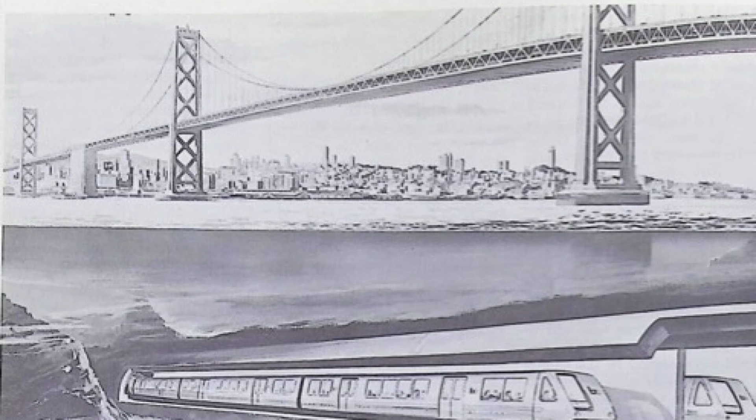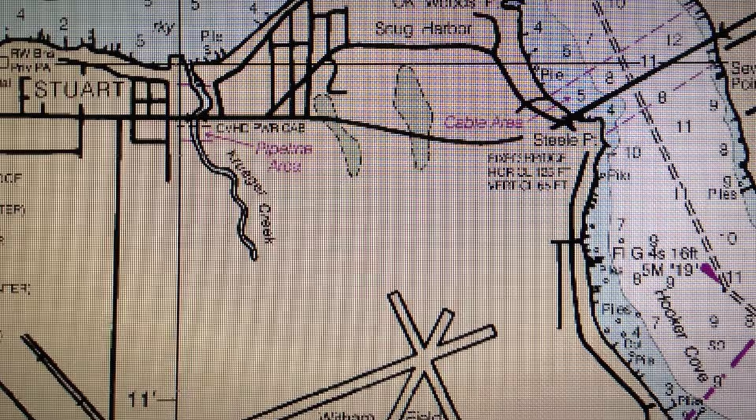Building a bridge seemed obvious at first. By the 1950s, suspension bridges were getting longer, reaching farther, conquering rivers and bays across the country. On paper, a bridge across the Chesapeake looked straightforward, except one detail changed everything.

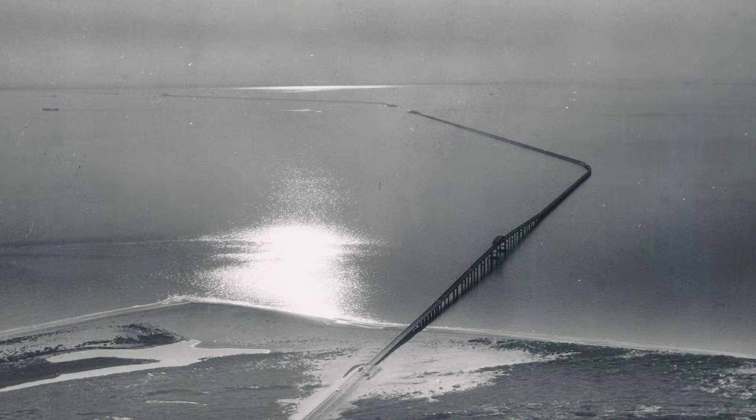The mouth of the Chesapeake Bay serves as the front entrance to Naval Station Norfolk, the largest naval base on the planet. Every aircraft carrier, every destroyer, every supply vessel assigned to the Atlantic Fleet must pass through a narrow corridor called Thimble Shoal Channel to reach open ocean. During the Cold War, that passage carried strategic weight. Navy planners raised a scenario engineers could not dismiss.

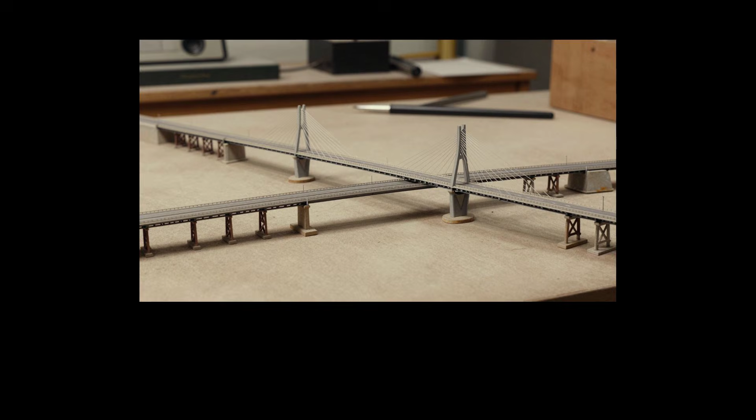What happens if a bridge collapses into the channel? It did not matter whether it was an accident, a storm, or an attack. The wreckage blocks the passage. The fleet gets trapped inside or locked out when it needs to return. They called it the cork in the bottle problem, and the Navy made their position unmistakable.

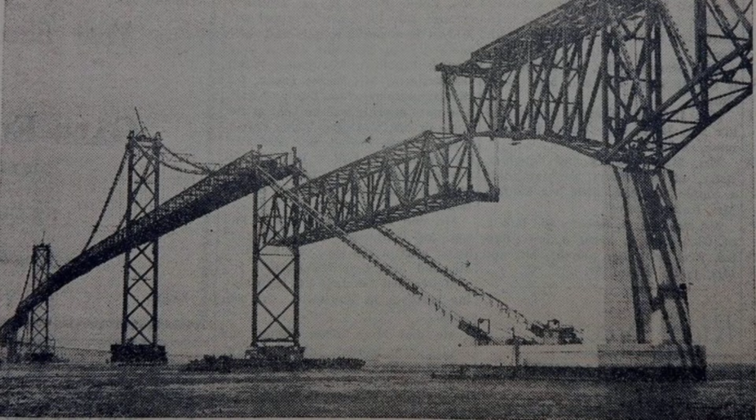Nothing could stand above those shipping lanes. Nothing. That single requirement eliminated the simplest solution and forced engineers to rethink the entire approach. They could not cross over the critical channels. They had to disappear beneath them.

The solution became a hybrid system. Instead of one continuous structure, they proposed a chain of different components, each solving a specific challenge. Low trestles would span shallow sections where ship traffic was minimal. High bridges would arch over secondary channels where collapse would not trap the fleet. But under Thimble Shoal Channel and Chesapeake Channel, the roadway would sink completely out of sight. Elegant on paper, nightmarish in practice.

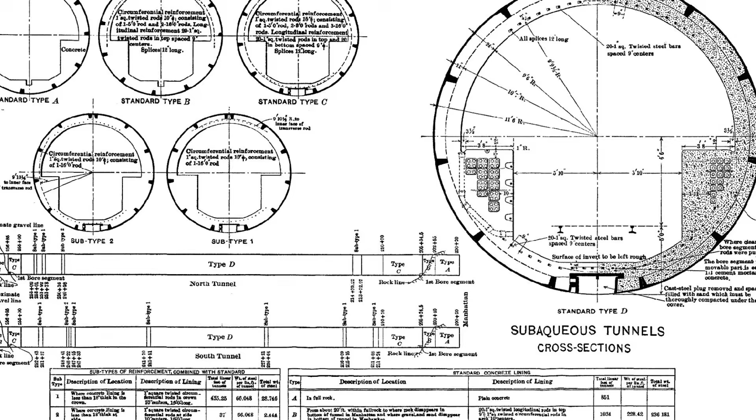Making those tunnels work required solving an impossible problem first. Where do you put the tunnel entrance when there is no land? Just open water, soft seabed, and currents that never stop moving. If the road needed to dive underground, it required solid ground to do it from. That meant creating land where none existed.

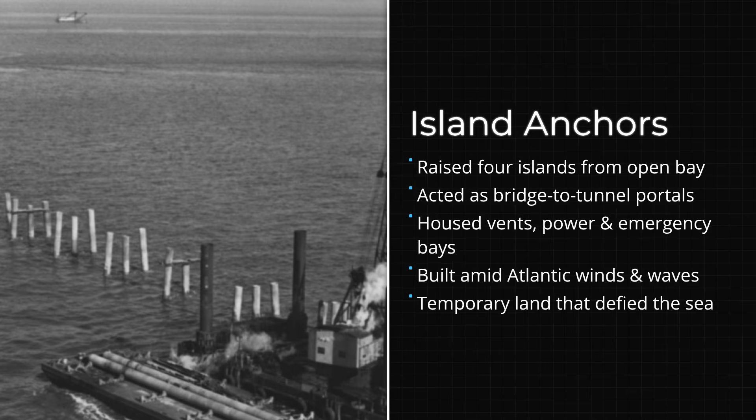The answer was 4 artificial islands positioned precisely at each tunnel entrance. These islands would anchor everything, housing ventilation systems, emergency access, and the transition points where bridge became tunnel. But building islands in 30 feet of water exposed to Atlantic weather, that is where things got interesting.

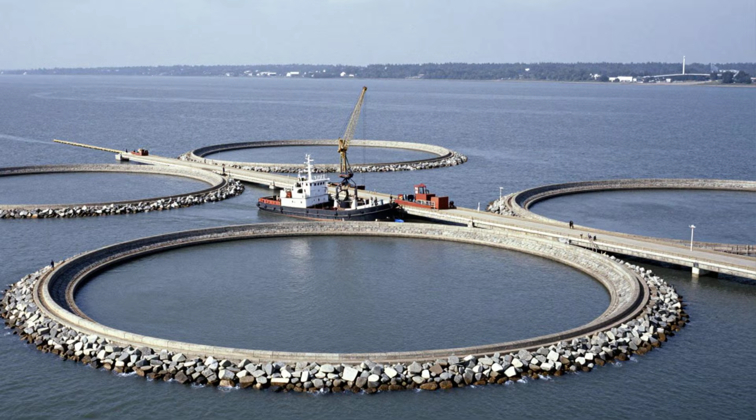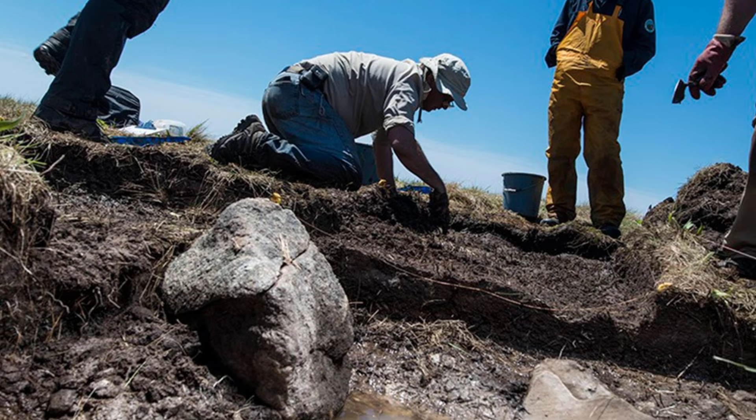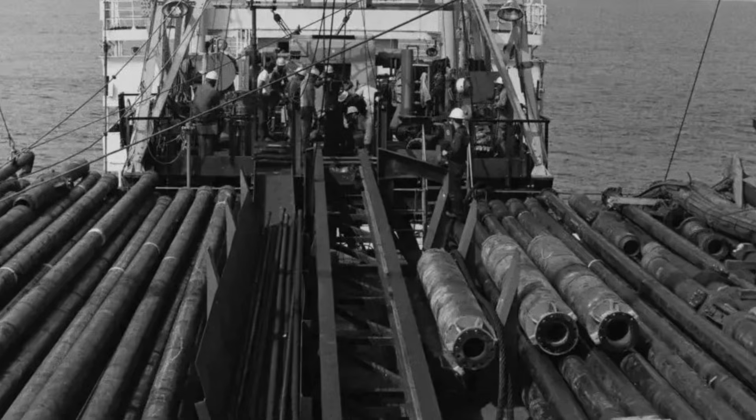Construction started by placing rock dikes on the seafloor to outline each island's shape. Inside those boundaries, hydraulic dredges pumped millions of cubic yards of sand into position. What rose from the water was not solid ground initially. It was a temporary landscape that needed to settle and compress under its own weight before anything permanent could be added. The islands were intentionally built taller than their final height, allowing soft sediments below to squeeze down before real construction began. Only after that settling slowed could work continue.

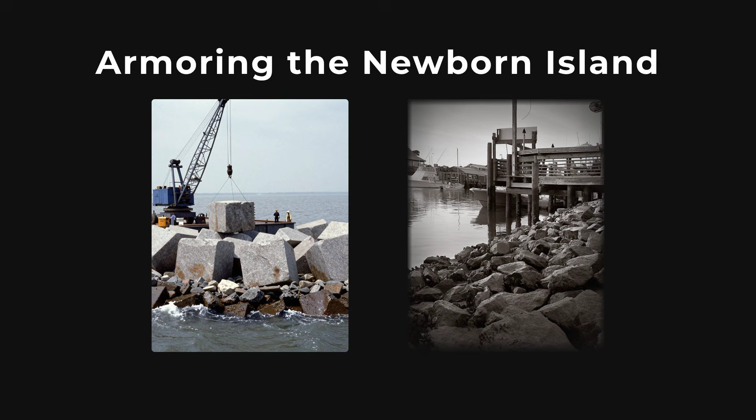To keep waves from washing the sand cores away, crews armored each island with massive stone layers. Small filter rocks came first, then granite blocks weighing several tons each. This armor reached above and below the waterline, protecting against wave action, tides, and storm surge.

For a period, it must have looked surreal. Land appearing in open ocean where only water had existed before.

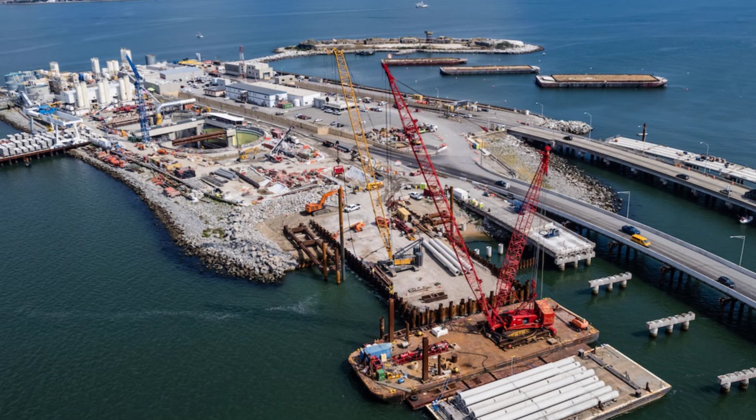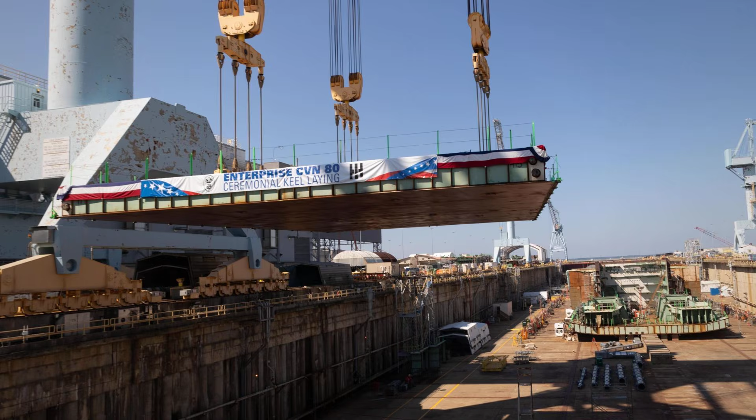The tunnels themselves were not carved through bedrock. They were built hundreds of miles away. Engineers chose a prefabrication approach, treating each tunnel section like a massive floating vessel. The sections were constructed at shipyards in Texas as sealed steel shells designed to float. Each completed section was launched into the water and towed 2,000 miles up the Gulf Coast and along the Atlantic to Virginia. Losing one at sea would have delayed everything by months.

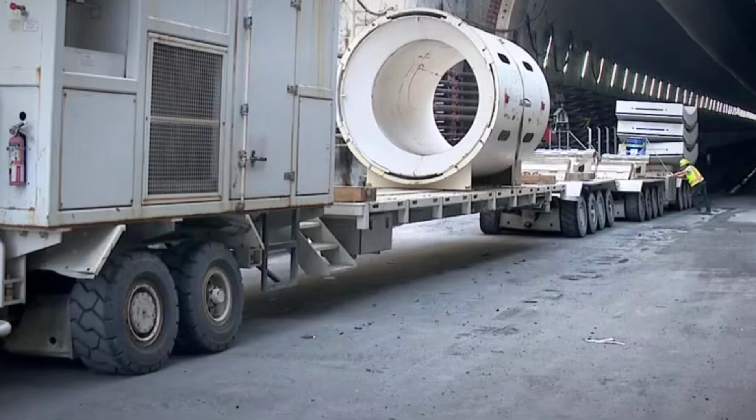While those tubes traveled, another operation was happening underwater. Crews dredged trenches across the bottom of each shipping channel, preparing foundations with extreme precision. A layer of pea gravel was placed and leveled to within inches using specialized equipment dragged along the seabed. If that foundation sat uneven, the rigid tunnel sections could crack or fail once buried under sand and pressure.

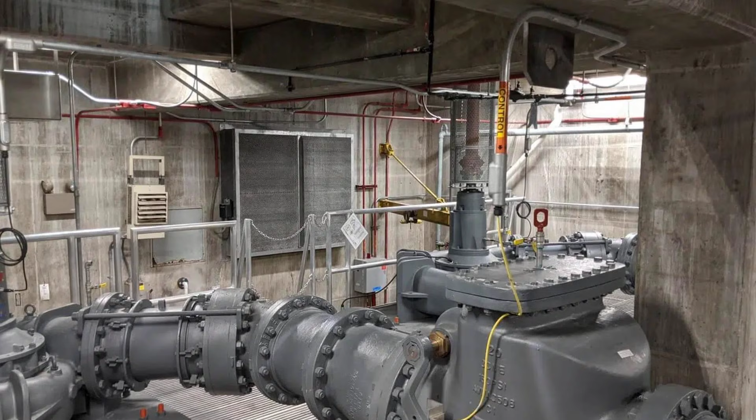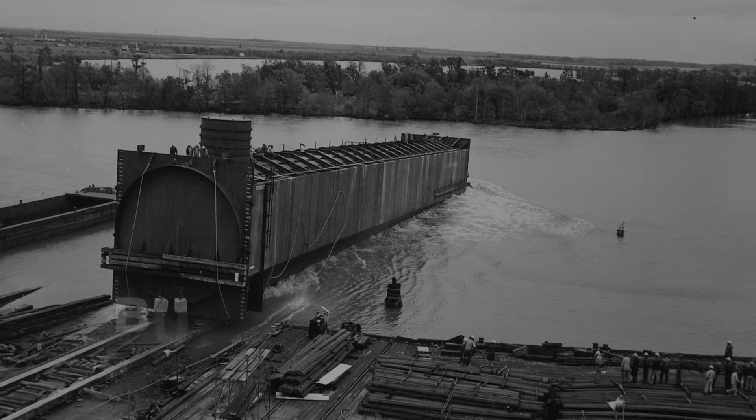When the time came, each floating tube was positioned over its trench and slowly lowered into place. Divers worked underwater, while support crews coordinated from above. Once two sections met, they were sealed from outside using concrete poured through tremie pipes. After curing, the water trapped between sections was pumped out, and workers entered to weld the steel shells together from inside. What happened next determined whether this entire approach would work. Concrete lining followed, transforming those floating steel shells into permanent roadways beneath the bay.

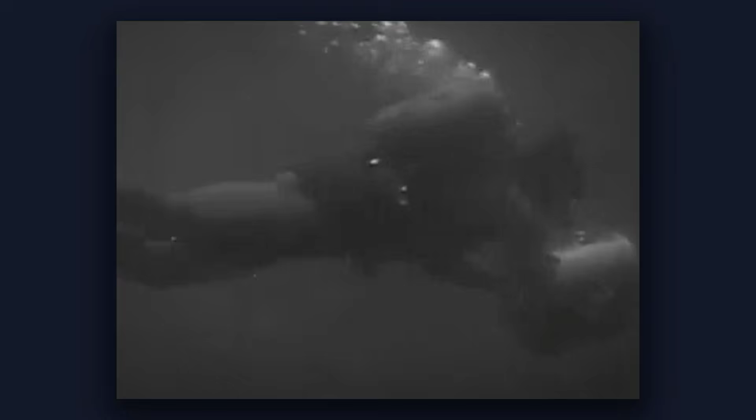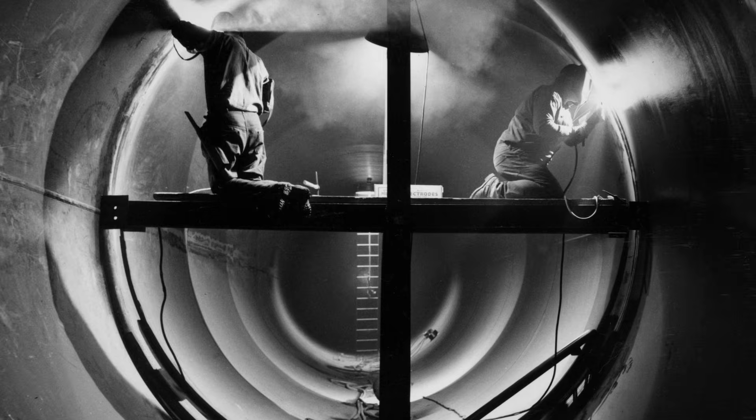Section by section, the tunnels took shape. Each connection required absolute precision underwater. Divers sealed joints with concrete poured through tremie pipes, while support teams coordinated from the surface. After each seal cured, water trapped between bulkheads was pumped out, and workers entered to weld steel shells together from inside. It was a process that demanded unwavering focus. One mistake could compromise an entire section.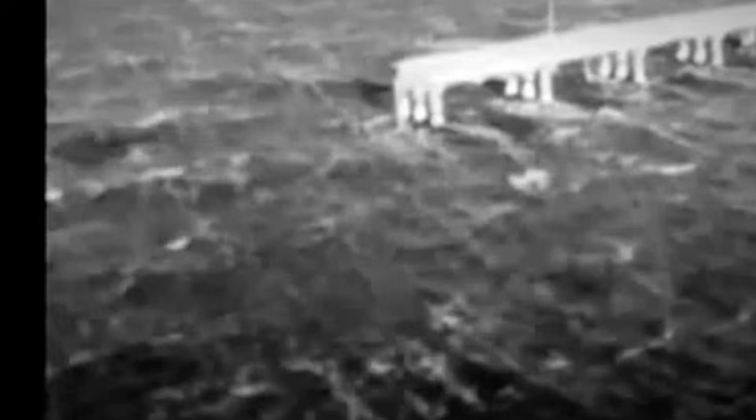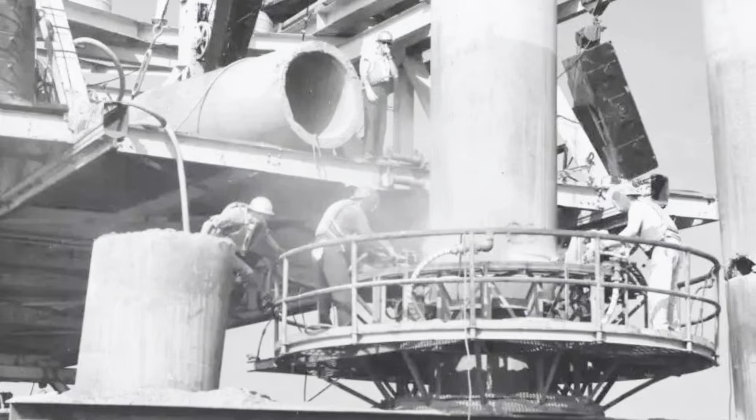Meanwhile, above water, the bulk of the crossing was advancing at remarkable speed. Most of the Chesapeake Bay Bridge-Tunnel consists of low-level trestles stretching across shallow sections. These spans needed to be built quickly and consistently. The seabed offered no bedrock for anchoring, just sand, silt, and clay, layered thousands of feet deep. Every support pile depended entirely on friction. Massive pre-stressed concrete cylinders were driven deep into sediment, some reaching over 170 feet below the waterline. Once positioned, those piles gripped surrounding soil tightly enough to support roadway weight, traffic loads, and storm forces for generations.

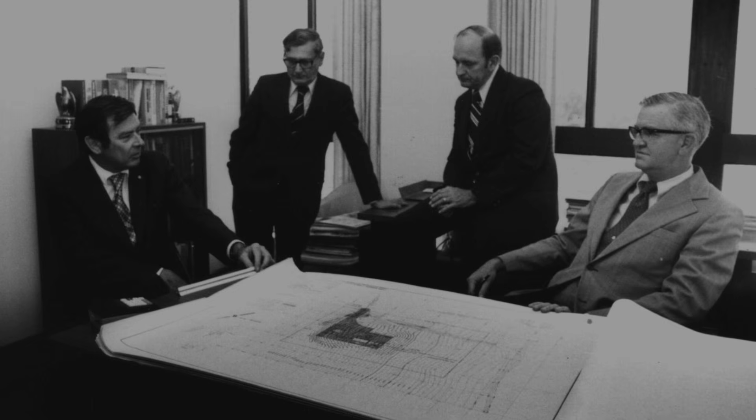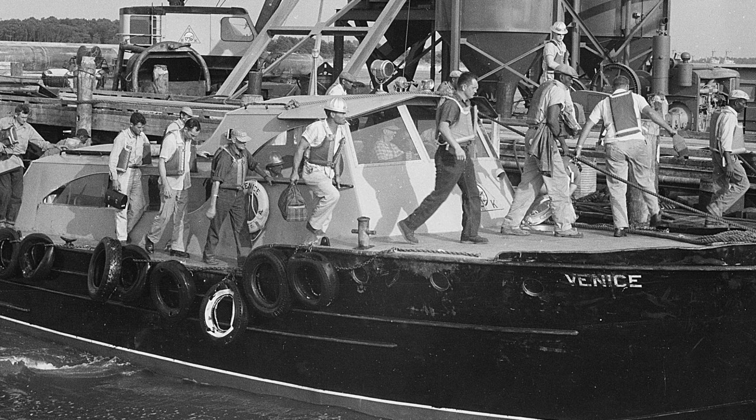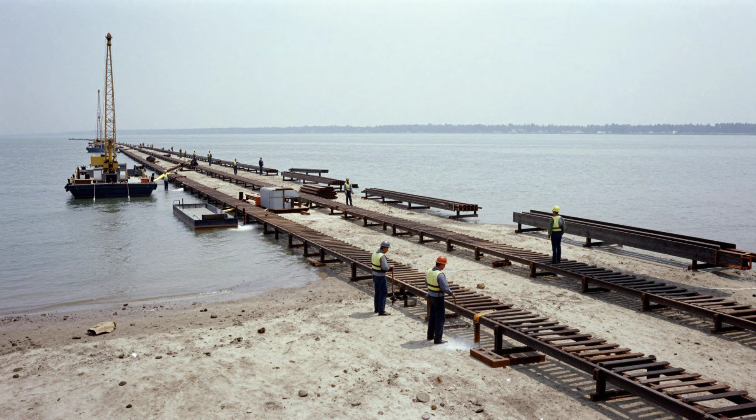Efficiency demanded specialized equipment. The construction crews relied on a jack-up pile-driving platform known as Big D. This machine transformed open ocean into a stable worksite. Steel legs descended into the seabed, then the platform jacked itself above the waves. Elevated and steady, cranes and hammers operated with precision no floating barge could match. Construction progressed like clockwork. Piles positioned, jetted into sand, driven to depth. Trestles advanced steadily across the bay.

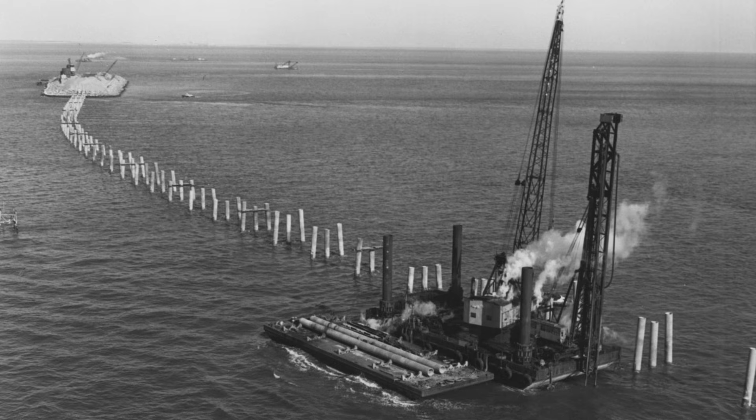But this efficiency created vulnerability. The entire operation depended on keeping Big D operational. There was no backup equipment of equal capability. By early 1962, the project was moving forward on an unforgiving timeline.

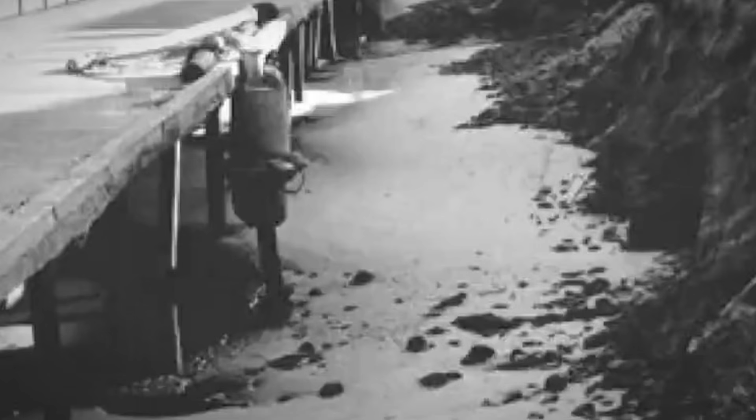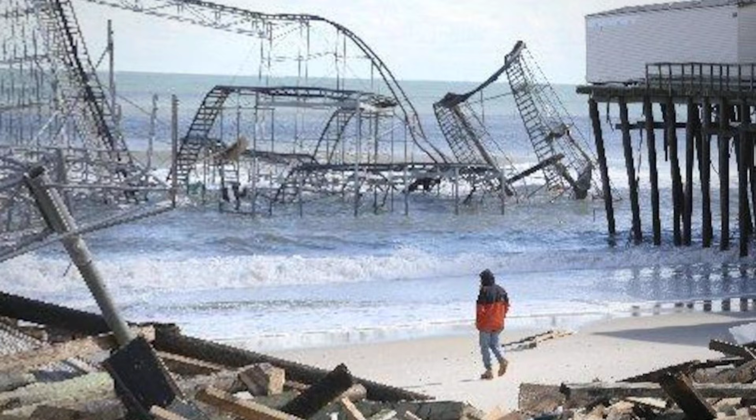Then the ocean intervened. A nor'easter stalled off the Atlantic coast. Instead of striking and moving on, it remained stationary. Wind and surge hammered the mouth of Chesapeake Bay relentlessly. Big D was jacked up to ride out the storm, but waves began pounding the underside of the elevated deck. Each impact transmitted force downward through the steel legs. The structure endured blow after blow until it could not anymore. The legs buckled and Big D collapsed into the sea.

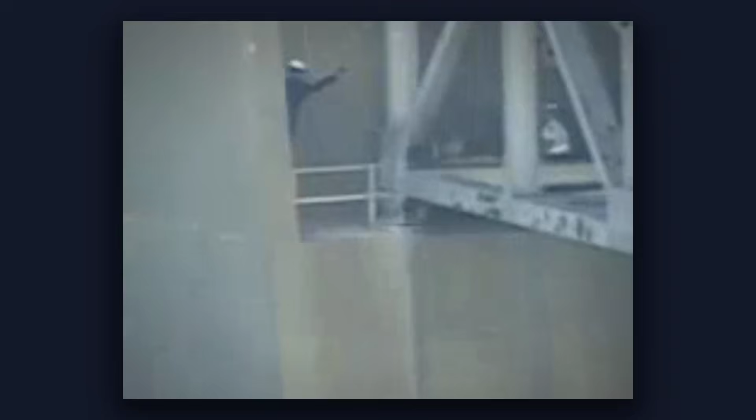As the storm continued battering the construction site, crews were evacuated by helicopter under dangerous conditions. No lives were lost in the collapse, but damage extended beyond the sunken platform. Across the project, partially armored island sections had eroded. Sand washed away where protective rock had not been placed yet. The storm exposed every weakness in incomplete defenses.

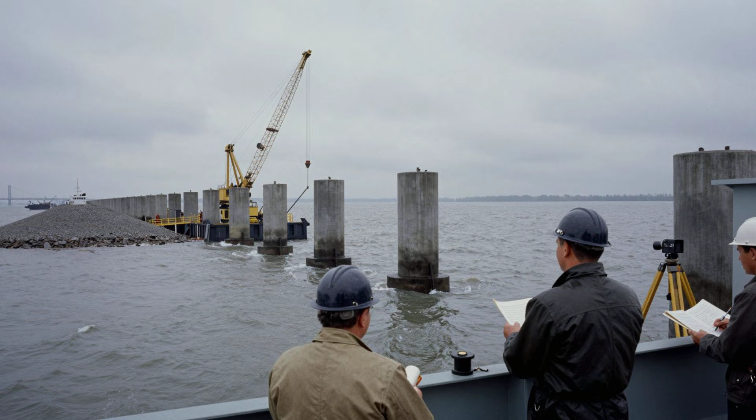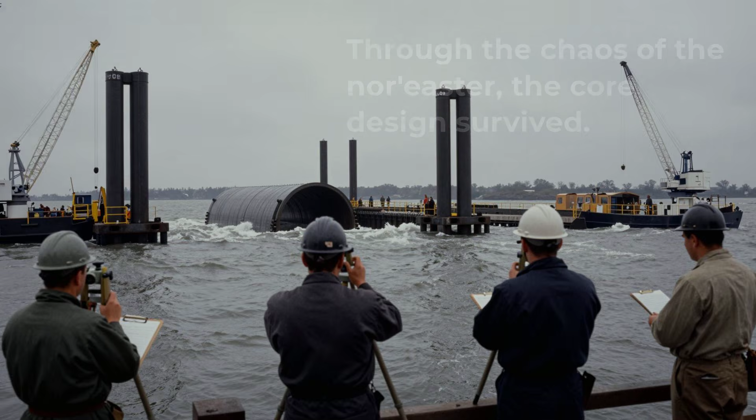Yet something crucial became clear in the aftermath. Concrete piles, already driven, held firm. Tunnel sections beneath the seabed did not shift. The storm had tested everything under real conditions, and the core design survived. From that moment forward, crews left nothing partially protected. It was a lesson learned at considerable cost. Construction resumed with renewed caution.

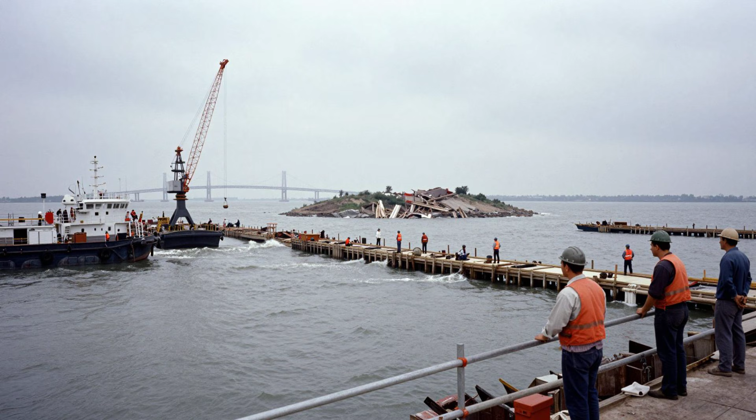The schedule had been pushed back nearly 3.5 months, but by spring of 1964, the crossing was ready. On April 15th, the Chesapeake Bay Bridge-Tunnel opened to traffic. For the first time in Virginia's history, the eastern shore connected to the mainland by fixed roadway. Ferries that had defined life along the bay for generations were no longer the only option.

Drivers could cross on their own schedule. The experience was unlike anything motorists had known. Roads stretching across open water, diving beneath the bay through tunnels, rising again onto man-made islands.

But once novelty faded, operational realities emerged. The original facility was 2 lanes only, one northbound and one southbound. There was no physical separation between opposing traffic. Many sections had no shoulders and no escape routes. Once vehicles committed to the crossing, there was no turning back. Any incident, regardless of size, could shut down the entire structure.

The Chesapeake Bay Bridge-Tunnel was undeniably a triumph. It worked exactly as designed, but it operated near its limits from day one. By the late 1980s, traffic volumes had grown steadily for decades. The 2-lane configuration had become a serious liability.

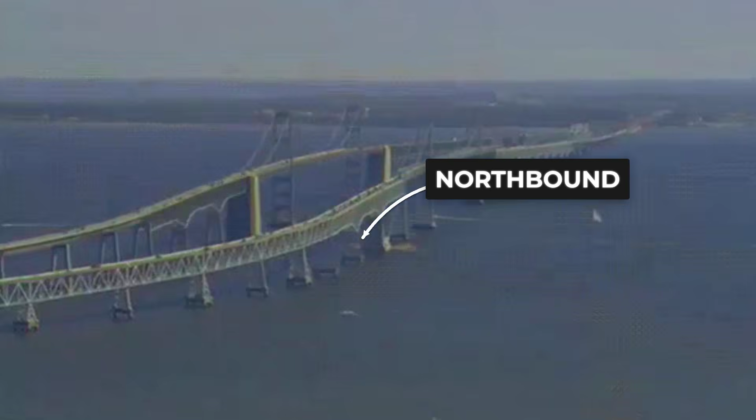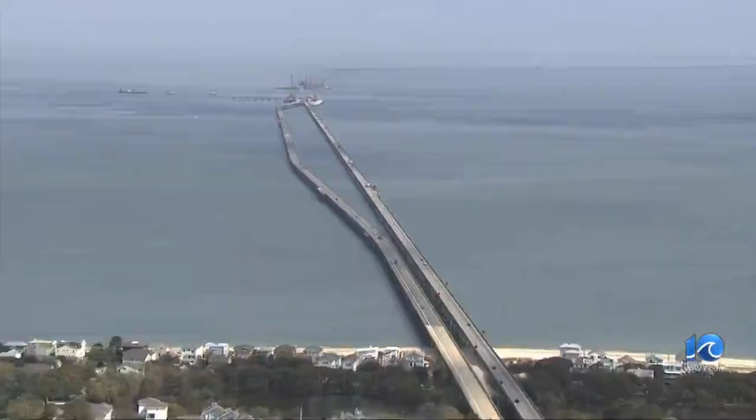Engineers proposed building parallel trestles alongside the original structure. Northbound and southbound traffic would finally separate, reducing collision risks and increasing capacity across much of the bay. Construction began in the mid-90s. New trestles rose just feet away from existing spans while traffic continued flowing. It was delicate work carried out in open water.

When parallel trestles opened in 1999, improvement was immediate. But expansion remained incomplete. At the tunnels, the crossing narrowed again, 4 lanes forced into 2, recreating bottlenecks that had plagued the facility before. The tunnels became the weakest link.

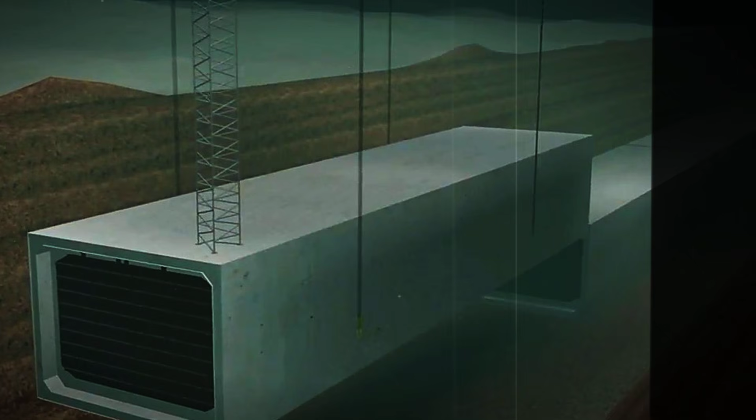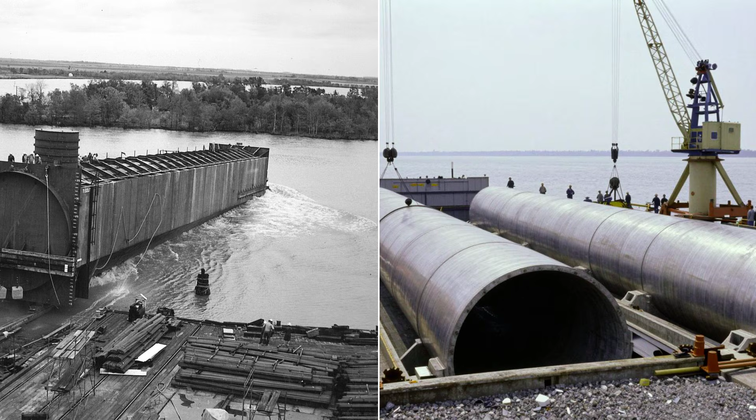Solving that bottleneck meant returning to the most challenging part of the entire crossing. The original tunnels used immersed tube construction, appropriate for 1960s technology and standards. Repeating that approach decades later created complications. Dredging trenches across active shipping channels would disrupt maritime traffic and disturb massive sediment volumes on the bay floor. Engineering had advanced. Expectations had changed.

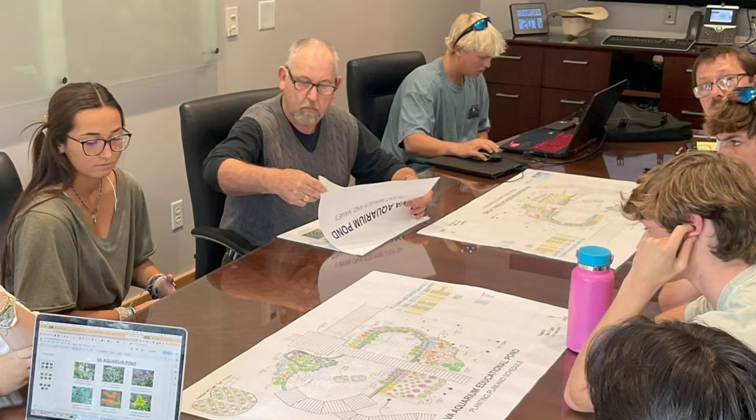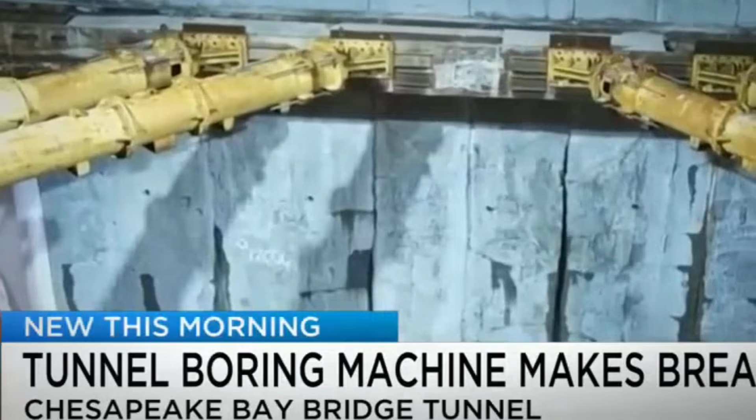Instead of trenching, engineers chose to bore a new tunnel beneath both channels using a tunnel boring machine. Ships could pass freely overhead while construction continued below. The seabed remained largely undisturbed.

The machine was massive, purpose-built for extreme pressure. It functioned as a moving factory, cutting through saturated soil and installing concrete segments behind itself, one ring at a time. Even superior technology encounters obstacles.

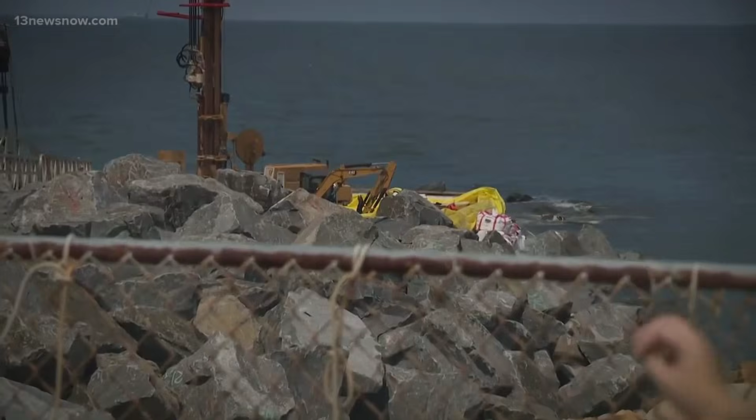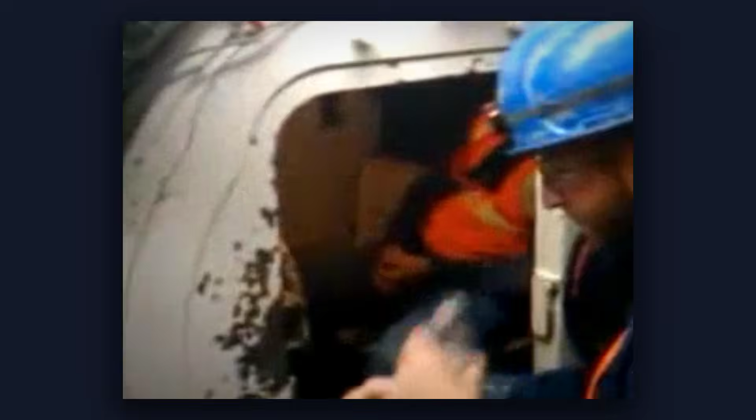Partway through, the machine struck something unexpected: a ship's anchor buried in sediment, lost decades earlier, never recorded on any chart. Impact damaged the cutting tool and halted progress entirely. Recovery required stabilizing ground ahead of the machine and entering the cutter head under hyperbaric conditions. Slow, hazardous work that delayed the project nearly a year.

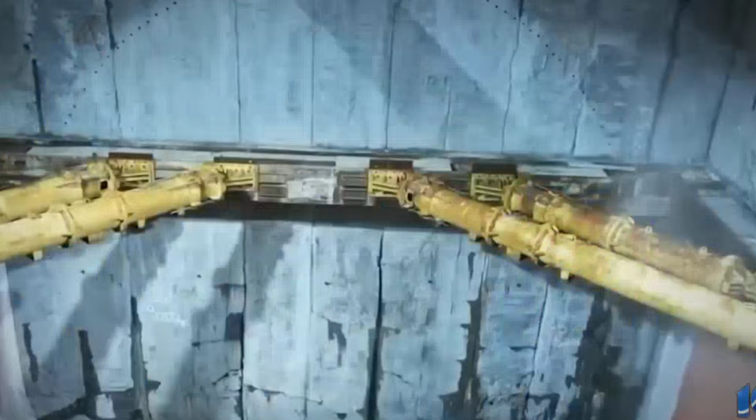In January 2025, the machine finally broke through into the receiving island. The most difficult phase was complete.

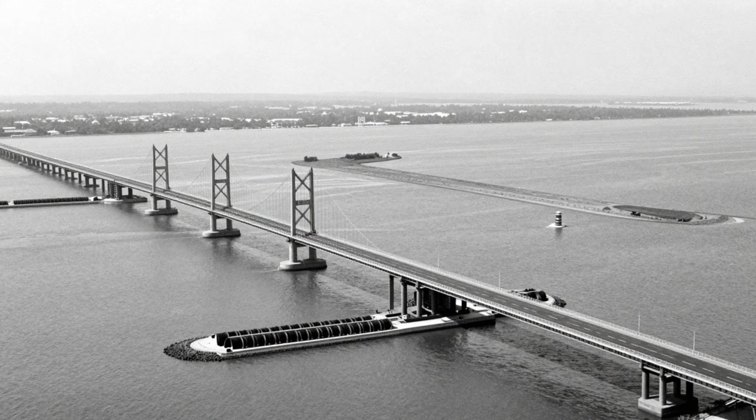What remains is a structure that was never meant to be static. Every decision was shaped by what the bay permitted and what it forbade. 17.5 miles of bridges, trestles, tunnels, and artificial islands were assembled in open water with inch-level tolerances and consequences measured in lives.

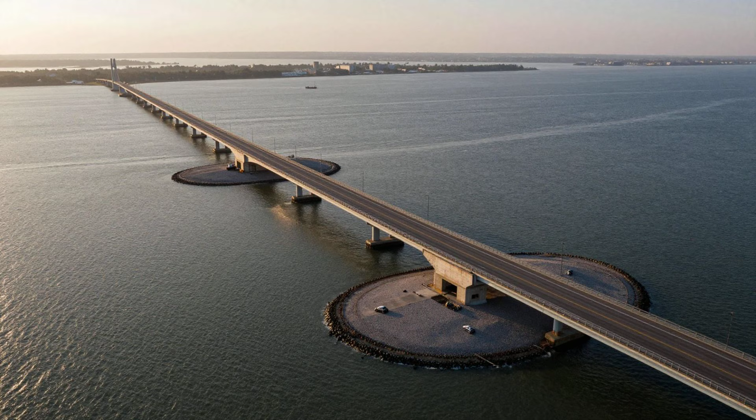The Chesapeake Bay Bridge-Tunnel connects two shores across open water, above it and below it, making an impossible crossing feel routine. 7 men lost their lives building the original span. Over 2,000 workers labored in rough water, underwater, on shifting sand.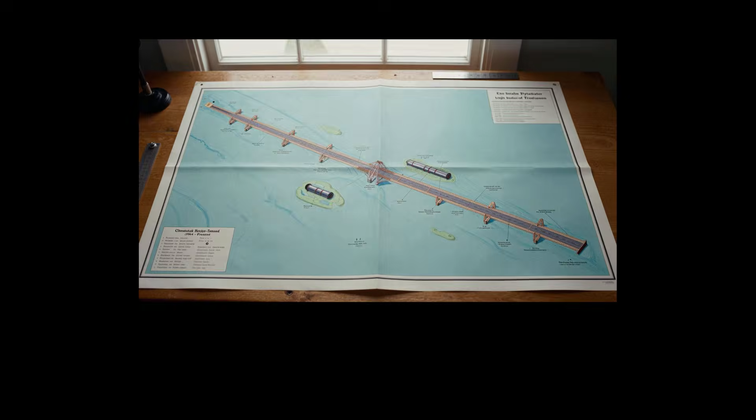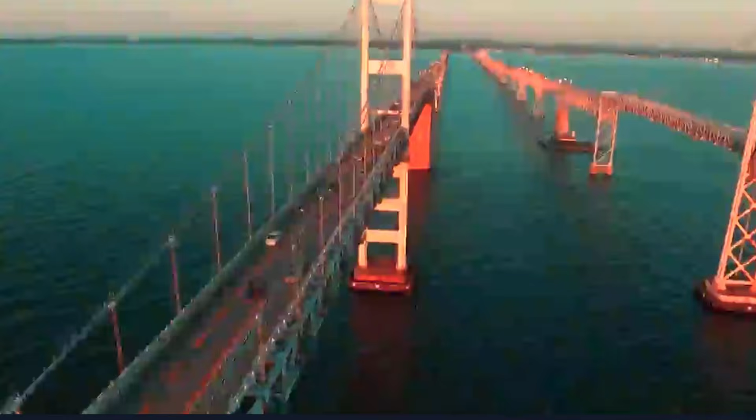The structure they left behind is not one continuous bridge. It is 6 separate systems working as one. 2 high-level steel bridges lift traffic over secondary channels. 2 tunnels are roughly a mile each. 12.5 miles of low-level trestles consist of 858 individual concrete spans. 2,600 pre-stressed concrete piles were driven over 170 feet deep into the seabed, where bedrock sits thousands of feet below.

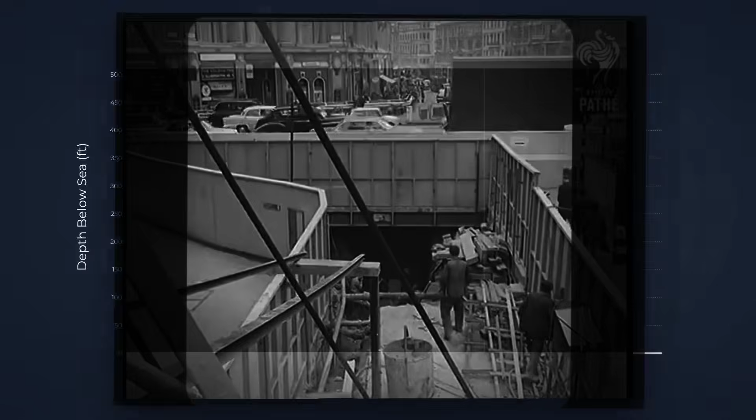4 artificial islands were built from 4 million cubic yards of sand, protected by 1.2 million tons of rock armor. Some boulders weigh 4 tons individually.

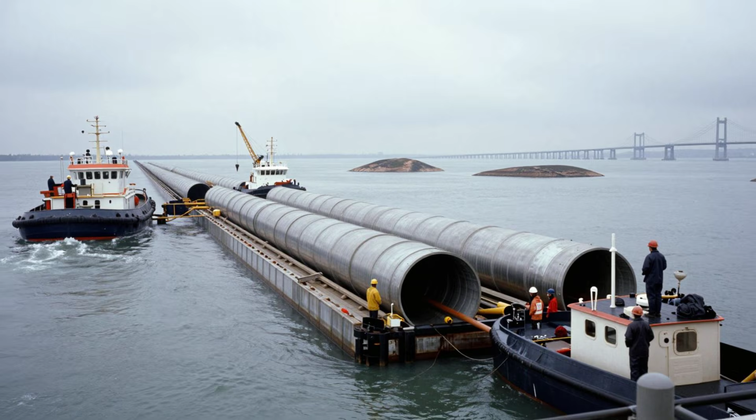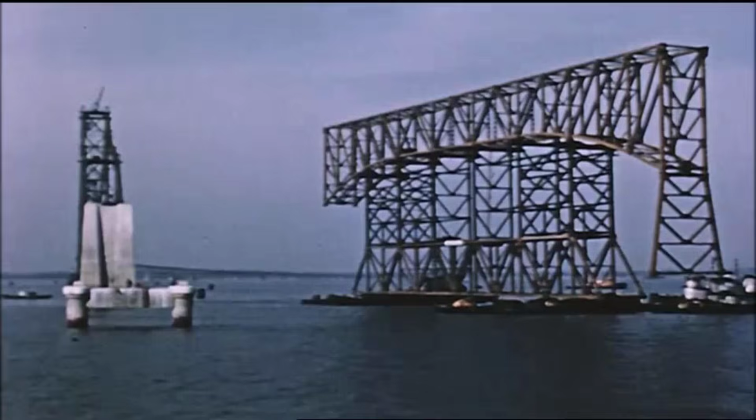The original tunnel tubes were not bored. They were immersed, 74 steel sections in total, each roughly 300 feet long, built in Texas and towed 2,000 miles to Virginia. They were lowered onto gravel beds, leveled to within 1.2 inches underwater.

When Big D sank in 1962, it was valued at $1.5 million. Rebuilding it today would cost between $20 million and $40 million depending on the manufacturer.

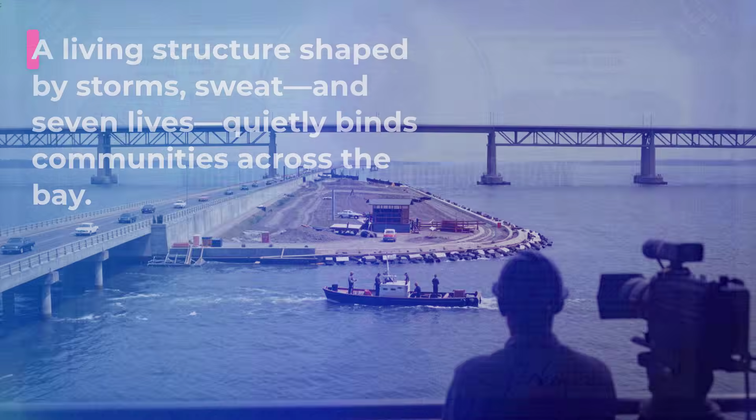Not 1 cent of federal, state, or local tax money funded this project. Not the original construction. Not the parallel trestles. Not the new tunnel bore currently underway. Everything was financed through bonds and repaid by tolls collected from those who use it.

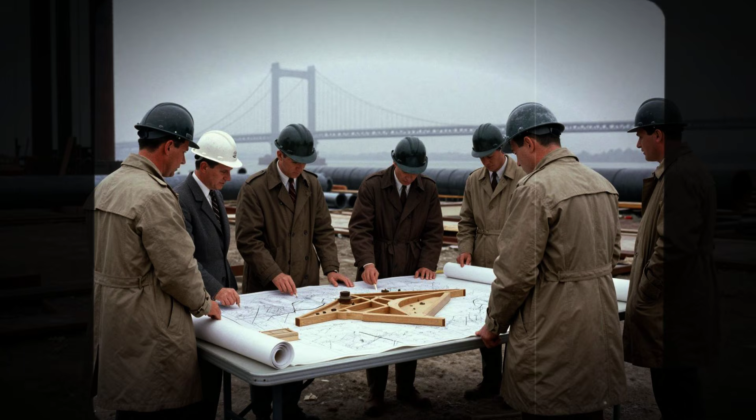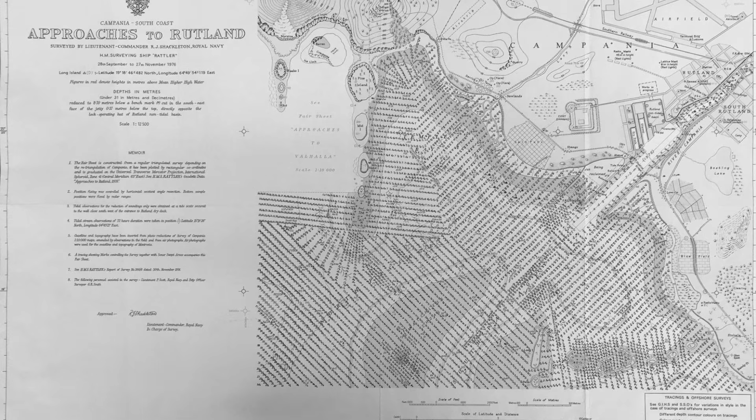What mid-century engineering accomplished here remains difficult by modern standards. The Chesapeake Bay Bridge-Tunnel solved a problem at extreme scale, creating a fixed crossing where the Navy said bridges could not stand, and geography said tunnels could not exist. It connects 2 shores across water that refuse to cooperate, making 17 miles of impossible infrastructure feel ordinary every time someone drives across it.